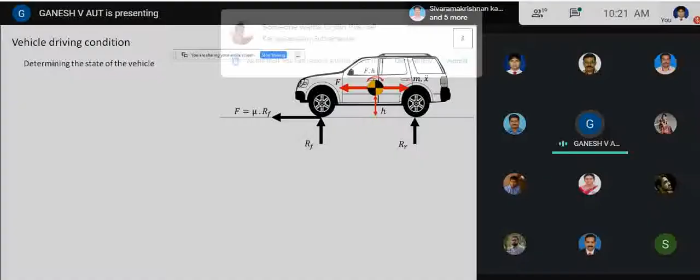According to the friction theory, F is equal to the coefficient of friction into normal reaction, the same theory we studied in engineering mechanics. So friction is very, very important to propel a car, not only propel, but stop, as well as dynamically balance a car. The simple way to explain: without friction, we cannot propel a vehicle, we cannot stop a vehicle, we cannot balance a vehicle. So friction theory is very, very important for automotive systems. No friction, we can't propel.

We can't imagine designing a car without this. Here's one application: the friction to propel a vehicle, the torque is converted as force. If there is sufficient friction between the tire and ground, the vehicle will propel. Otherwise, the vehicle will not propel.

Why have I given force only to the front wheels? Why not the rear wheels? Because it's a front wheel drive vehicle, so the friction force develops only at the front wheels. That is mu into RF, the maximum value is mu into RF. This is the force acting on the vehicle.

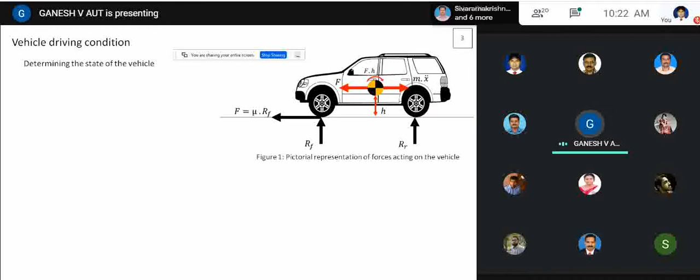Coming to Newton's law, the basic law as everyone knows, F is equal to ma. Here F is the total force acting on the body - in automotive systems, we call it tractive force. m is the mass of the vehicle, a is the acceleration of the vehicle. Simple equation, F, the tractive force, equals mass times acceleration.

So here, a I can write as d square x by dt square. Consider x as the displacement, x dot is the velocity, x double dot is the acceleration. This is purely a mathematical expression: d square x by dt square is equal to f by m.

Here one question arises: f is the applied force, and I'm equating it to m x double dot. In practical cases this would not happen, because any body under motion will definitely have resistive force - the whole world, anything trying to move, we cannot avoid friction force. As a design engineer, we are supposed to reduce the frictional force to improve performance or efficiency of the system, but we cannot completely avoid friction force.

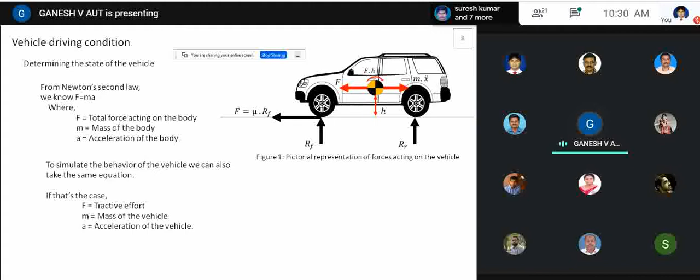There is no torque, no tractive force, then the vehicle will not move. Practical case, you can see that on a mud road, the vehicle gets stuck and the wheels are slipping. That's why in engineering mechanics, while rolling without slip, we use the expression F is equal to mu n.

Okay, so this is the integration that everyone knows. Here I am assuming F is 2000 Newton, a constant. I am assuming that in my case, continuously 2000 Newton of force is acting on the vehicle. The mass is 1000 kg. So 2000 divided by 1000, I'm getting 2 meter per second square. So this is the acceleration of my vehicle, the change in velocity with respect to time.

So once again, integrating F by m gives 2t plus c1, a constant. I'm getting dx by dt equal to F by m, which I replace as 2t plus c1. This is equation 1. Again integrating, I'm getting x equal to t square plus c1 t plus c2.

So now look at these equations. F by m equal to 2 — that is one equation, the acceleration of the vehicle. If we look at the second equation, dx by dt equal to 2t plus c1, that is the equation of motion, the velocity of the vehicle. And the third one, x, the displacement of the vehicle, means the distance traveled by the vehicle after a particular time.

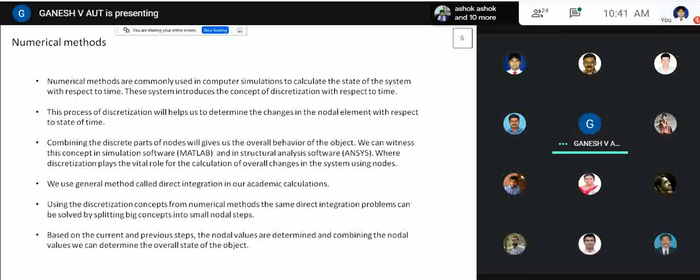So this problem, how I solved it using numerical methods, that is FEM. Initial boundary condition, we know F naught equal to 0. Here F naught is the displacement of the vehicle at time t equal to 0. Do you agree what I'm telling?

F naught equal to 0, what does it mean? F naught is displacement at time t equal to 0, the displacement of the vehicle is equal to 0. Similarly, F dash naught, velocity of the vehicle at t equal to 0, the velocity is 0. Similarly, F double dot 0, acceleration of the vehicle, that is 2 meter per second square, constant for my case. So this is the initial boundary condition.

Using the initial boundary condition, I will tell you how you get this equation. F1 is equal to F naught plus F dash naught plus F double dash naught divided by 2. That is basically how I get this expression from Taylor series. The numerical integration, the very fundamental basis is Taylor series. From the Taylor series only, they derived many expressions and many advanced solvers.

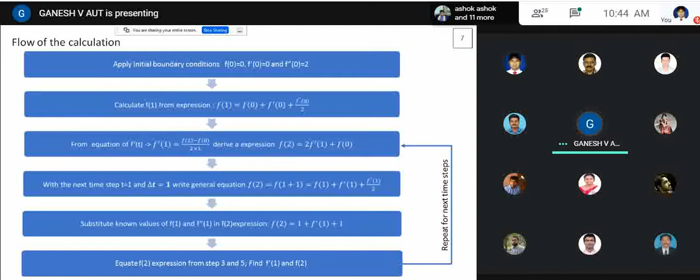So this flowchart is given for my simple system. So the Taylor series, how do you get this expression for velocity and acceleration? And Taylor is defined, that function, any function with respect to time, how that function responds for small delta t.

What does it mean? F of t plus delta t, what does that mean? Any function. In our case, what is that? F is a function of t. Ft is nothing but our displacement. Do you agree? Ft is equal to displacement. I could not recall my value, I think so, t square. My case is t square. What is the effect of change in time, a small change in time?

Taylor series gives an equation: f(t + Δt) = f(t) + f'(t)Δt. So this is purely mathematics. Similarly, for the decremented value, f(t − Δt). This is the second equation of the Taylor series.

So I am subtracting equations 1 and 2. The first one is f(t + Δt), the second is f(t − Δt). Subtracting these two, I get f'(t) = [f(t + Δt) − f(t − Δt)] divided by 2Δt. It's a simple direct subtraction. Similarly, adding them, I get this.

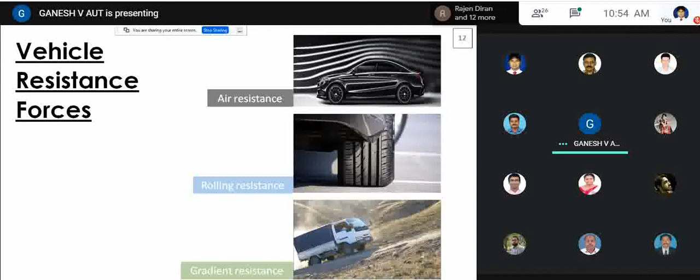In the application, we can convert force into torque with respect to perpendicular distance. The torque is a twisting moment, right? So these three loads are acting on the vehicle and on your engine crankshaft. Engine crankshaft rotation is prevented by these three forces through the driveline. If you take a car: wheel and axle shaft, then differential, gearbox, clutch, flywheel and the engine crankshaft. So these three forces act on the engine: air resistance, rolling resistance, gradient.

Then one more is resistance due to inertia. Inertia is very important. As D'Alembert says, the inertia force is an imaginary force acting at the CG of the vehicle. Mathematically we can define it as mass into acceleration of any body. So during starting, the inertia force is high in the vehicle. That's why we move the vehicle from the first gear. We need more tractive effort. Then gradually we change gear, reducing the force, because during starting high inertia is required. Similarly, the air resistance, rolling, and gradient.

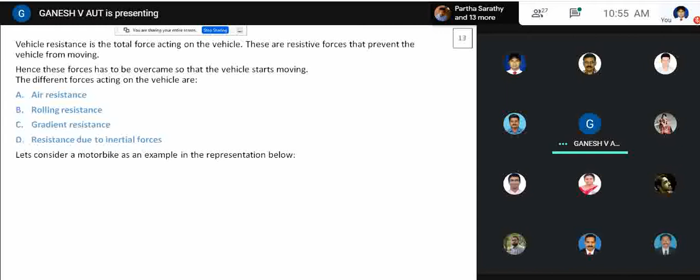Let us take a ship. A ship is propelled in water. So the resistive force will be high. It's partially immersed in water, partially immersed in air. Okay, so in the pure automotive case, our medium is air. So how to calculate this rho? In thermodynamics, we have used rho is equal to P divided by RT: atmospheric pressure, temperature, and gas constant. Then frontal area of the vehicle.

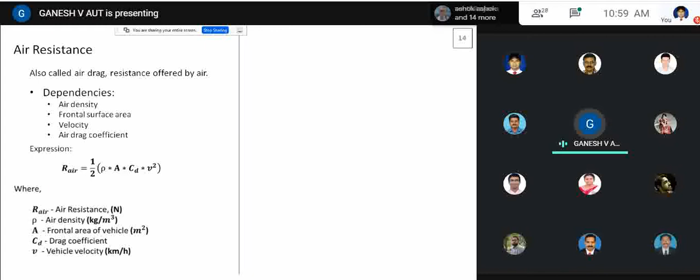Similarly, rolling resistance. It's a function of vehicle weight. If the vehicle weight is more, the rolling resistance is high. That is defined here, it's a function of weight. If the weight of the vehicle is increased, then the resistive force will increase. They're directly proportional. Gradient resistance we already discussed. That is W sin theta.

How do you get the W sin theta? You resolve that weight parallel to the propelling plane and perpendicular to the propelling plane. Again, engineering mechanics, resolving the forces. That is the application of resolving forces. I'm resolving W into two components, W sin theta and W cos theta. W sin theta is parallel to the inclined plane. W cos theta is perpendicular to the inclined plane. Inclined plane means the propelling plane, the plane on which the vehicle is moving, right?

So W sin theta contributes. Let us take theta equal to 0, that means a level road. Theta equal to 0, then it becomes 0. The whole W is acting perpendicular, right? So this is a simple expression.

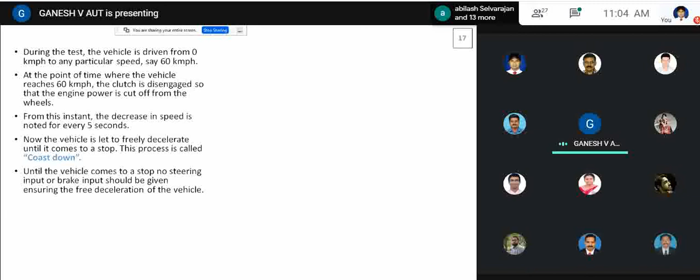Only rolling resistance and air resistance is considered: A plus BV plus CV square. This is the resistive force acting on the vehicle. So how to find out this thing, right? This resistive force, the resistive force FRT. How to find out this?

If you have a vehicle, you have to run the vehicle at any speed, right? 70 km per hour. Then you remove the tractive force. That means you hold the vehicle clutch. Then what would happen? The vehicle velocity decreases with respect to time. So you note down that velocity and time. So you have the velocity and time graph, right?

Once again, I'm telling, if you want to find out these parameters A, B, C, we are supposed to find them out. From vehicle to vehicle, it may vary. A, B, C is the coefficient of resistance. That varies vehicle to vehicle. So how to find out those coefficients? You have to run the vehicle to a particular speed, 70 kilometer or 60 kilometer. After reaching 60 kilometer, you hold the clutch. By holding the clutch, you are removing the tractive force.

At that time, only the resistive forces are acting on the vehicle. Do you agree? You are holding the clutch, only resistive force is acting. So you get the velocity and time. You have to measure the vehicle velocity and time. So you get a graph. That graph is very important for finding the A, B, C values.

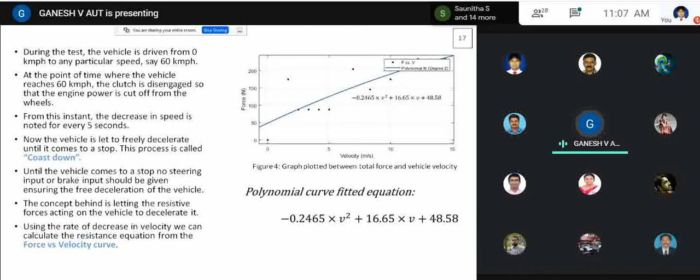Now you see how to solve this x double dot. In my previous case, x double dot is equal to F by m. Now look at this equation, how to do that? So I'm struggling here. How to solve this differential equation, a function of x? So in this case, I need software. Then it is easy for me to find out the solution, right? We may solve this, but it will take some time. Only if we have enough knowledge in mathematics can we do this.

Similarly, I have a doubt whether we can solve it using the direct integration method. We are supposed to use numerical simulation. Once you are using numerical simulation, it's a lengthy calculation. The calculation may be simple, but we have to spend more time. So this is the application of FEA and the application of many software. So here, you will get x dot, you will get x. This is the real time.

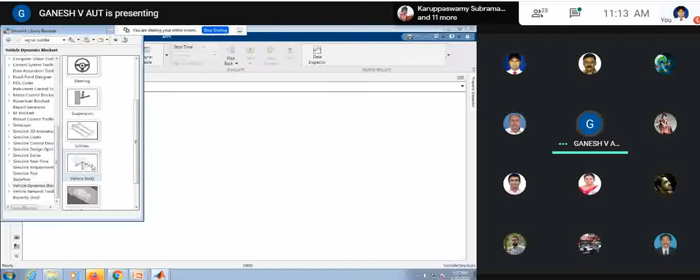Let us take vehicle dynamics; they have developed many models. We don't need to build any model, they have already developed them. If you want, you can use them. Otherwise, if you have developed your own mathematical model, you can directly use it. Here are the commonly used blocks. The blocks you are using, we can find here.

So in our first case, what is the first case? I integrate twice. F by m is equal to 2. Please recall it: F by m, acceleration, is equal to 2. Integrating twice, you will get the velocity and displacement of the vehicle. So I need an integrator block. I need one more integrator.

Copy. So slow. Copy and paste. So, integrator. Let us assume in the first integrator, the acceleration is the input. What is that acceleration? F by m. It is not a function of time. Force as well as mass is not a function of time. Both values are constant.

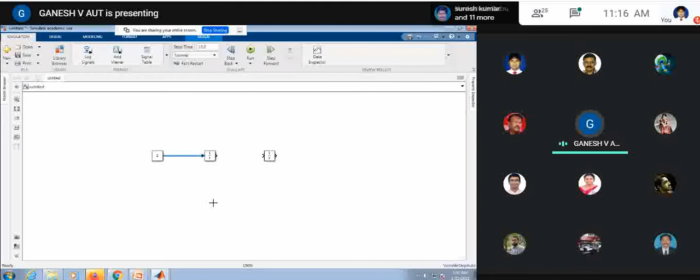So F by M, this is the input. I'm talking about my first model, first case study. What is the value of F by M? F by M is 2. I'm giving the input. This signal is acceleration. Signal name: acceleration of the vehicle. Left mouse and you can drag.

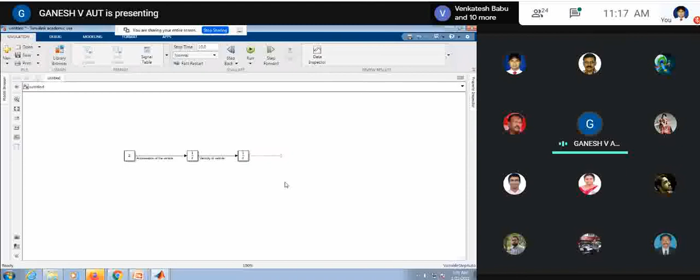Integrating once, I'll get velocity. What is this signal? This is velocity of vehicle. The output is displacement. I want to look at this output, so I am supposed to use a scope, output scope.

So this is a scope. I can look at the output, but I want to look at the acceleration, velocity, and displacement. So I need 3 inputs. Actually, this has only one input. So I go to the format, sorry, signals and ports, number of input ports. I need 3.

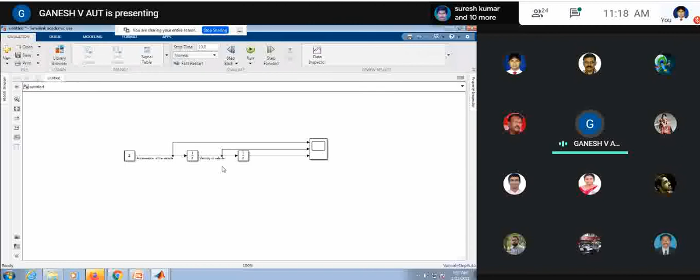So F by M is acceleration. It is 2. Integrating once, I will get the velocity. Again integrating, I will get the displacement of the vehicle.

I want to run the program for 10 seconds. If you want to run the program for 100 seconds or 20 seconds, you can change it. Actually, in our direct integration method, we calculated for 5 seconds. So I put 5. Now I run the program.

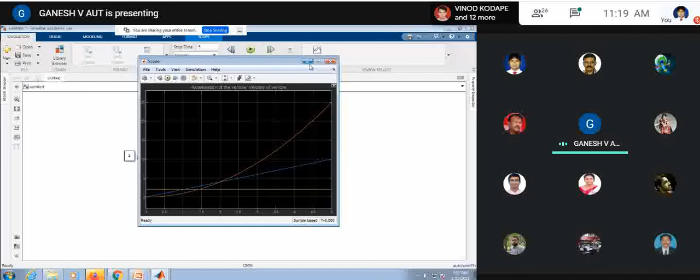So it is solved. If you are getting any error, you will get the error message, but I think it is solved. I'm opening the scope. Here you can see it is 100%. So you see, I have the vehicle velocity, displacement, and acceleration.

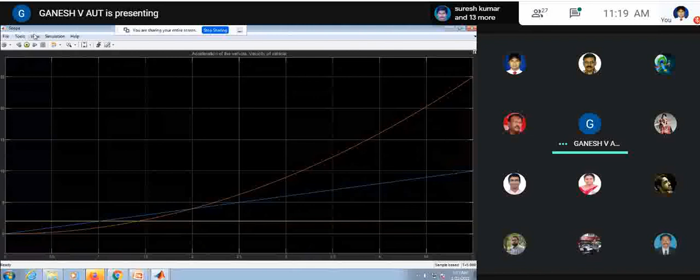If you want to make it separate, go to View, Layout. So I change this. First one is acceleration, velocity of the vehicle, and the third one is displacement of the vehicle.

Once again, if you do any changes, you have to run it again, then only it will reflect the displacement of the vehicle. You see, the acceleration is constant, 2 meter per second square. Velocity of the vehicle varies with respect to time. X-axis is time. I have run the program for 5 seconds.

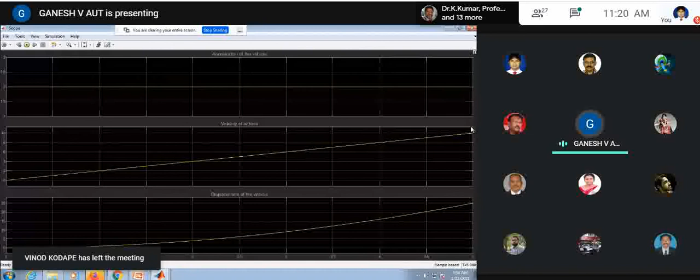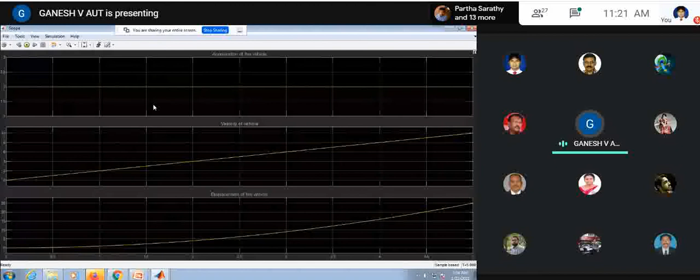If you look at our method, direct integration or numerical method, we are getting the same solution, because velocity is 2 times of time. Let us take time equal to 5: 2 into 5 is 10. So velocity of the vehicle after 5 seconds is 10 meter per second. Similarly, if you check the displacement, the square of time, 5 square, you will get 25. The input is 2. So this is the simple model for my case 1 without any resistive force.

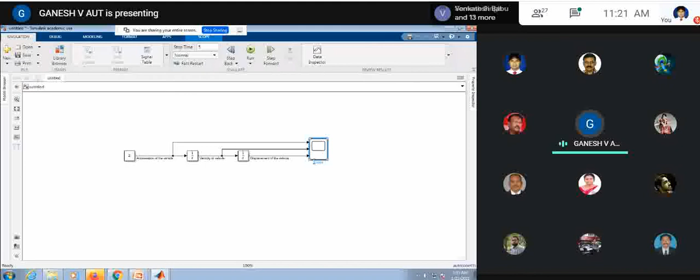With resistive force, I can get this. Suppose you want values, say example at t equal to 0, what is the value? t equal to 2 - if you want, you can get the values.

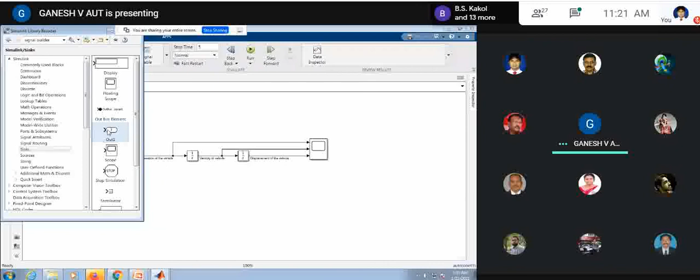So you go to library browser, Sinks, and put an Out. Displacement, velocity, right? In modeling, model settings, if you want to change this it will be so easy - that's why in model settings, data input/output, instead of data set, you put array. Now I'm going to run this program.

Again I run it and look at these values in the main screen. So in the main screen, actually this is what happened - you can get all the values. Actually here you'll get the workspace. Something happened.

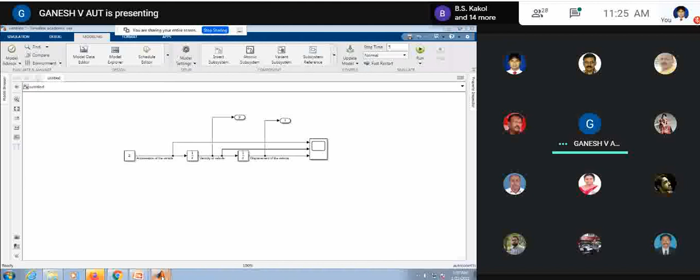So this is a simple model, right? Again I come to my PPT presentation. So this is again the theory part, tractive effort and its relationship.

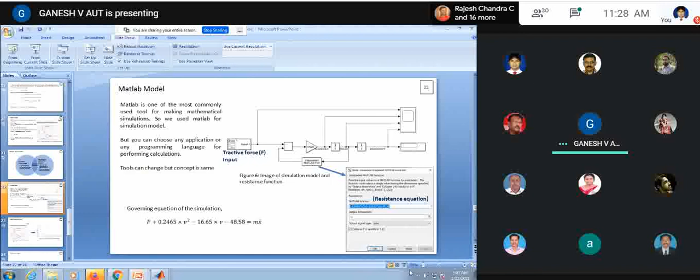Now, this is the simulation model for my case 2 with the resistive force. You can see this is the model - a real time model where tractive force is acting as a function of time, and the resistive force is also acting.

I have modeled this again, integrating acceleration, velocity, and displacement, and you will get the output. This is here - this is an application of numerical integration.

Using numerical integration or MATLAB, any higher-end software, we cannot do certain mathematical work manually. If you have sufficient knowledge in mathematics, you can solve this governing equation - this mathematical modeling for a real-time vehicle. If you have sufficient knowledge, we can solve it, but the problem is it will take a long time to solve this.

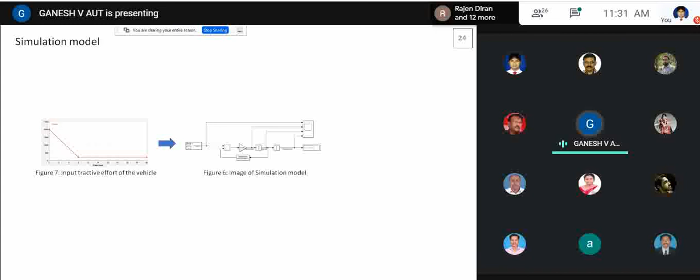If you can immediately ask that, you may know that after 6 seconds the vehicle velocity is constant because it is reaching the maximum speed - around 6 seconds it reaches maximum speed. Look at this, this is the input to the model. So I can find the acceleration, velocity, and displacement, and I will get the graph like this. The first one from the top is the input.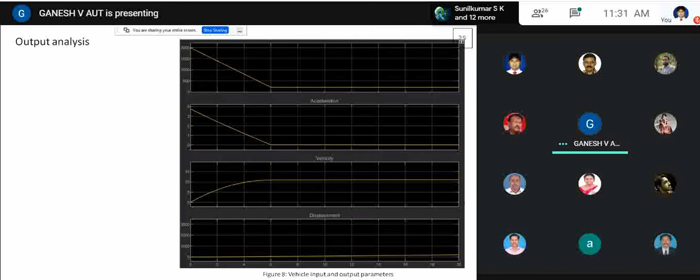I recall my first case, F by m equal to 2, meaning the acceleration is only 2, a constant value, a simple case. Here it is a force as a function of time - not a constant value, it varies with respect to time. That function of time is the input. The second one is the acceleration, the third is the velocity, and the fourth is the displacement.

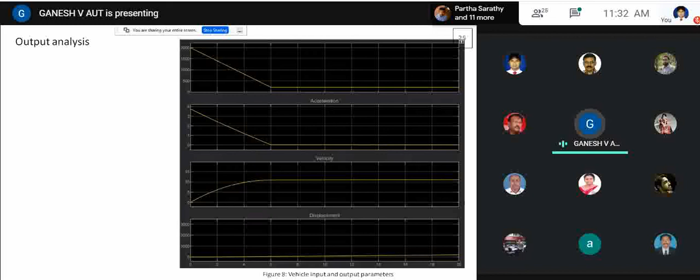Displacement is not zero actually - there is some value, but because the scale is 1000, 2000, 3000 meters, it looks like zero. Actually it is not zero, you'll have some value. So this is the output for that mathematical model - this is for case 2, as I also did for case 1.

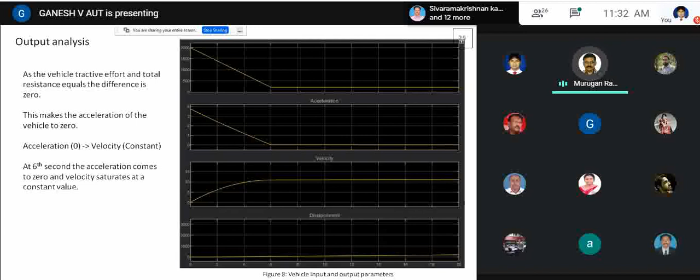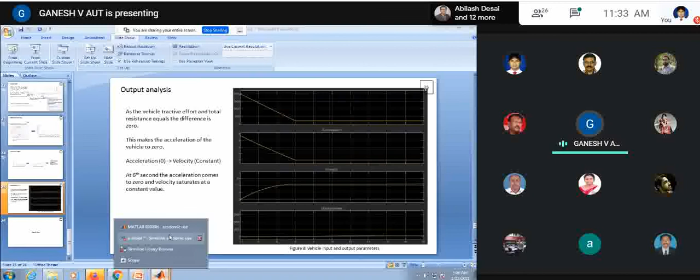Murugan sir, I think time's up - shall I continue or wind up? We have 10 more minutes, sir. If you want, you can continue, no problem. Then I will finish it, right? For me it's no problem, 10 minutes is not an issue. It's okay for participants. Otherwise we'll open for the question session, sir. No problem, okay sir, what is the opinion? Okay sir, open for questions. We'll stop the presentation, okay.